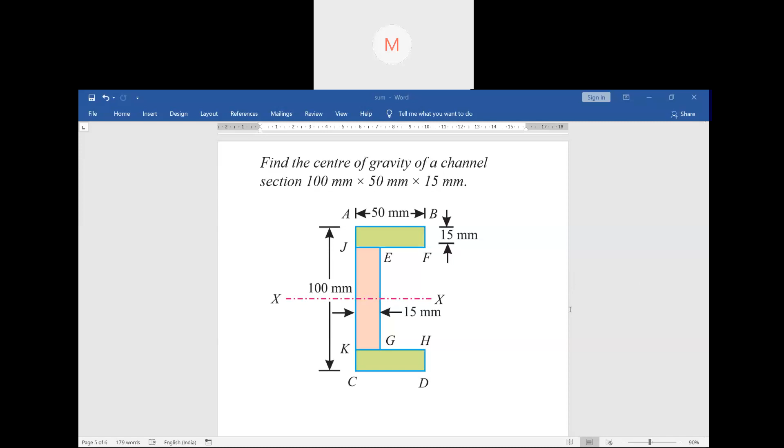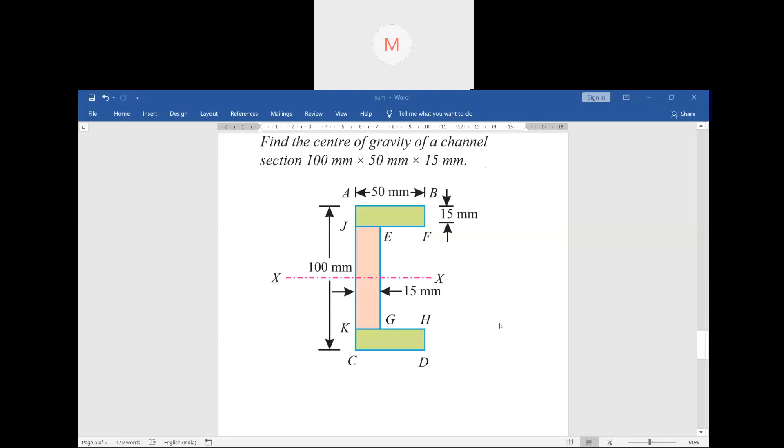17.7. Kabom. Yeah. Kabom. Okay. Okay. Very good. Very good. You guys have tried. That's a very good thing. Those who got 17.79, 17.8, that is the correct answer. Okay. So this is how it is being done. The others who got different answers, you have to refer to the solution. Just have a look at it.

Do I need to explain this numerical to the ones who didn't understand? Yes, someone please respond. Students, I'm asking you something. Do I need to explain it or it's okay? Explain a bit, sir.

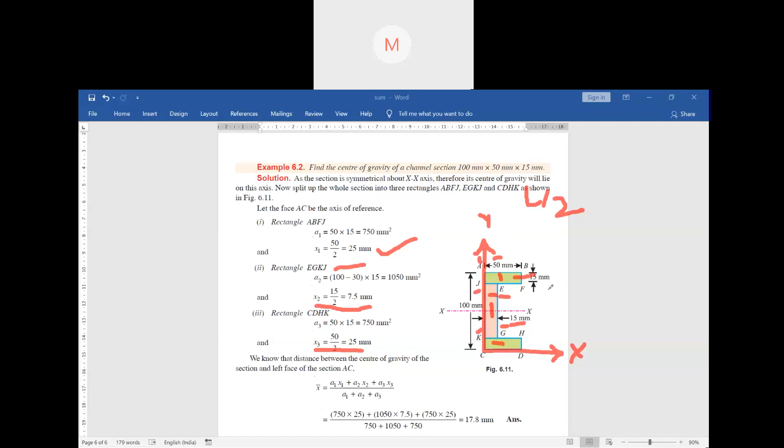Now, if you see here, you found out the area for this one. Now if you have to find out the area of rectangle EGKJ, how will you find out? This is 100, right? The total. Now you have to subtract 15 from here, 15 from here. That means subtract 30. Now the thickness is 15 mm, you all know. So 100 minus 30 into 15, this is how you will find out the area.

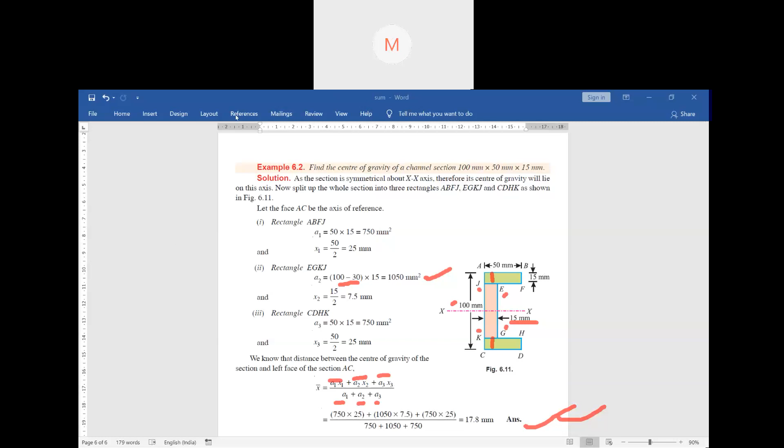Rest is simple. Now we all know the formula. The formula is what? A1x1 plus A2x2 plus A3x3 divided by A1 plus A2 plus A3. And eventually you'll get this answer. Simple. Okay, I think it is clear for everyone. Is it clear? Yes, sir. It's clear. Okay, good. So now we're done with this. So let's go to some other topics. So that last numerical is clear, right? Yes, sir. Okay.

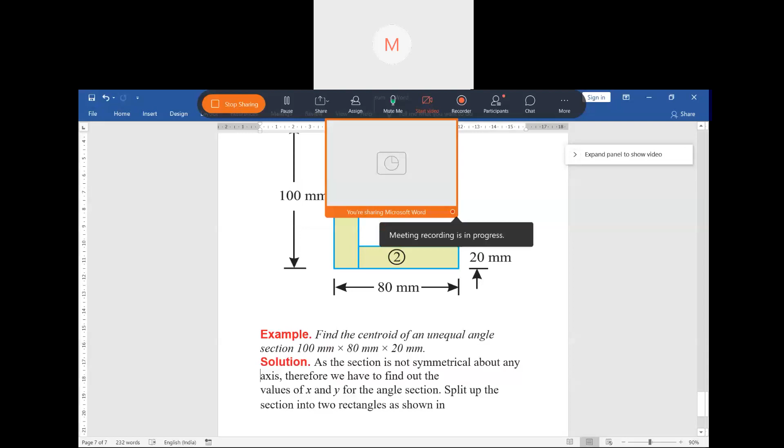So now we are going to solve our next one. So how will you solve it? Can you see my screen? Can you see my screen? Nothing, sir. Nothing. Give me a minute. We can see, sir. Okay.

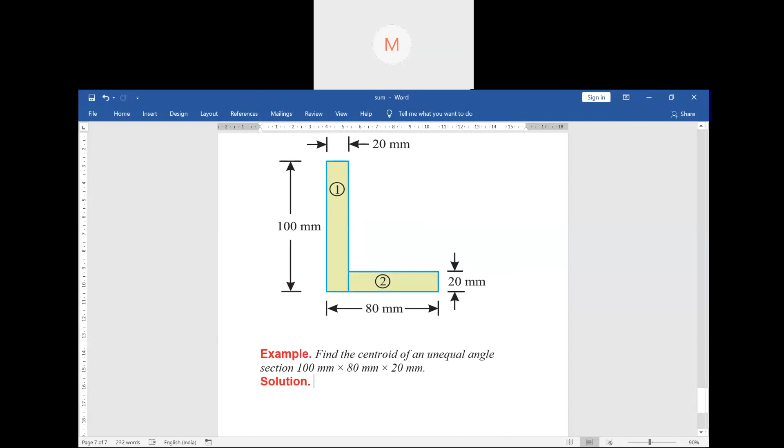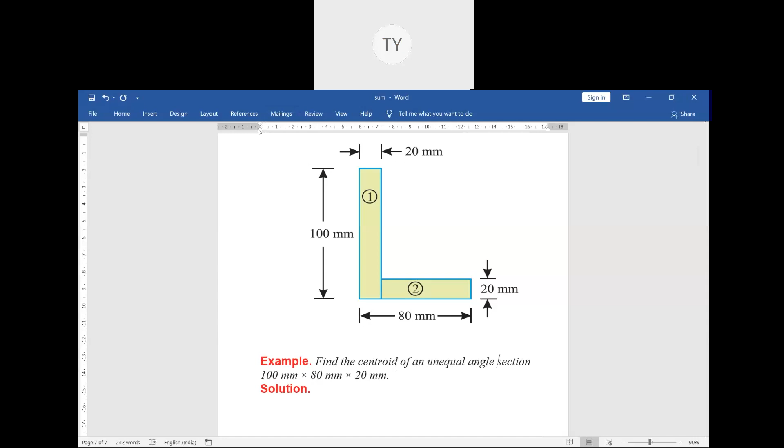You can see it. Now look at this figure. Just pay attention here. So how can you find out the centroid? First of all, tell me if this figure is symmetrical. No, sir, I don't think so. You don't think so? Give me yes or no. Don't give a diplomatic answer, Temazar. No. Yeah, good. That's what should be an answer.

Someone gave yes. Okay. According to Temazar, it is no. It is not symmetrical, right? Temazar? Yes, sir. Okay, fine. Imsong said that it is yes. Anyone with yes? Or everyone is no? Okay. Suraj said no. Fine. So, Imsong, just please pay attention.

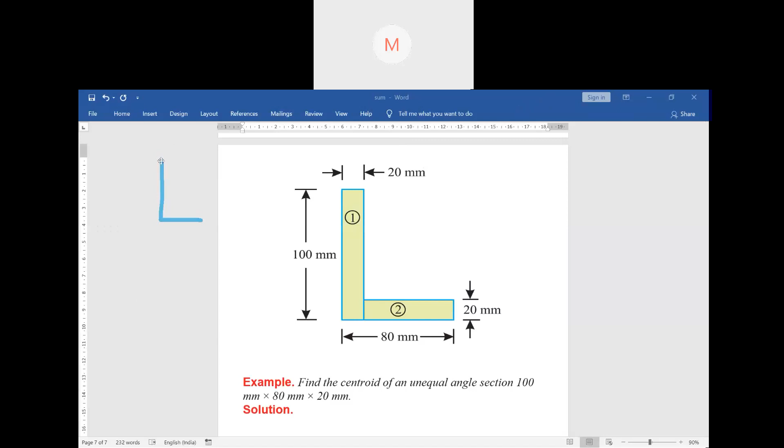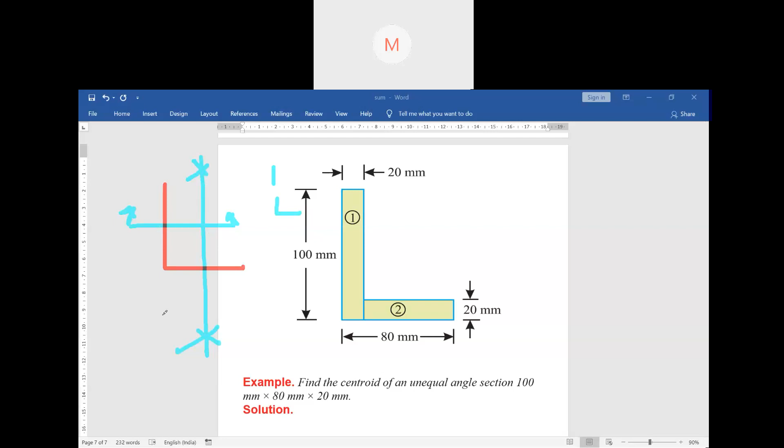So, how can it be symmetrical? Look, if you just divide this figure, this is an L, right? If this is an L, if you cut this from here, this is in Y direction, so you'll get like this and small like this, right? Now, if you cut it from here, you'll get a similar thing only. There are half here and half here. So these are obviously non-symmetric, right?

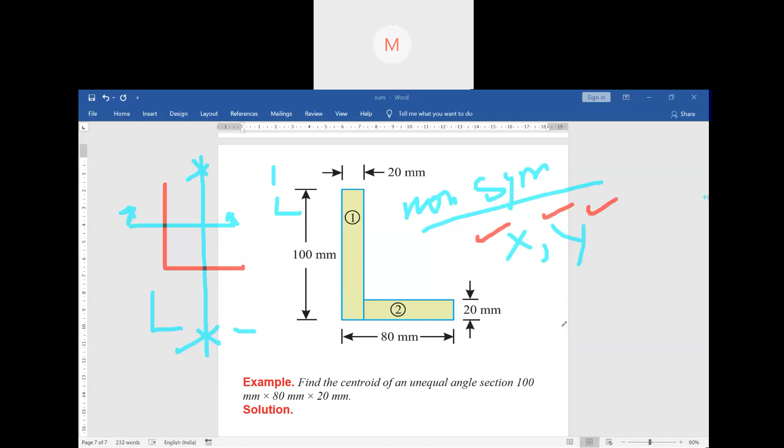So if this is not symmetrical, then there is no point of finding out only x or y. Yesterday someone asked me why we are finding out only x or only y. Look, that is what the difference is all about. If the figure is symmetrical, then we have to find it only for the direction in which it is symmetrical. If it is x, you go for the x formula. If it is y, you go for the y formula. But in this case, the whole figure is not symmetrical, right?

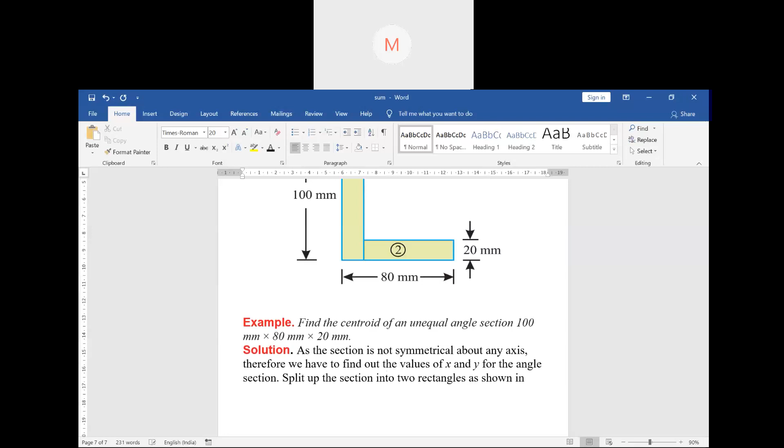If the whole figure is not symmetrical, then definitely you have to find out for both x and y. That means you have to find out a1, a2 first of all, and then you just consider.

Then you just consider it what? Like this, the axis. Here it is this one, like this, the axis. Yes, you just consider this and this, these two axes. So you just consider this is y, and this is x, right?

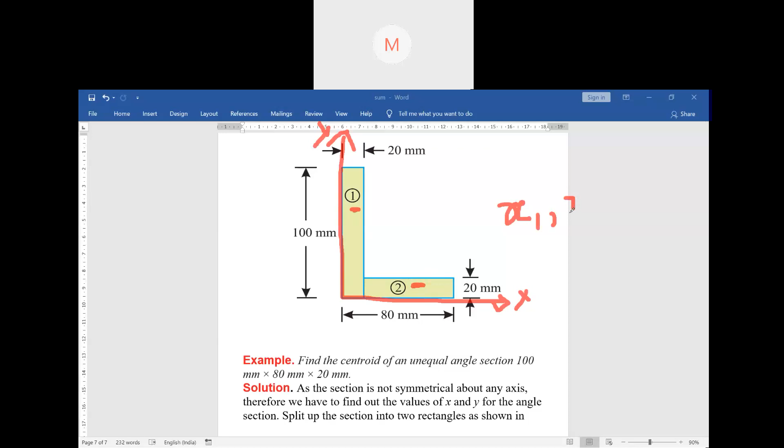So you have to find out what? There are two figures, right? 1 and 2. For convenience, I have just marked it down. So you have to find out x1 and x2, and then y1 and y2, because this is not symmetrical. That is why you have to find out x1, x2, y1, y2. Then only we will be able to find out x bar and y bar, right?

So did you get it? So can you try it out to solve? I guess this is very easy. You should try. Will you try, students? You got your copies, right? Yeah, okay please. Yes sir. Okay, try. Everyone try. Yeah, good. Once you are done, just show me the answers.

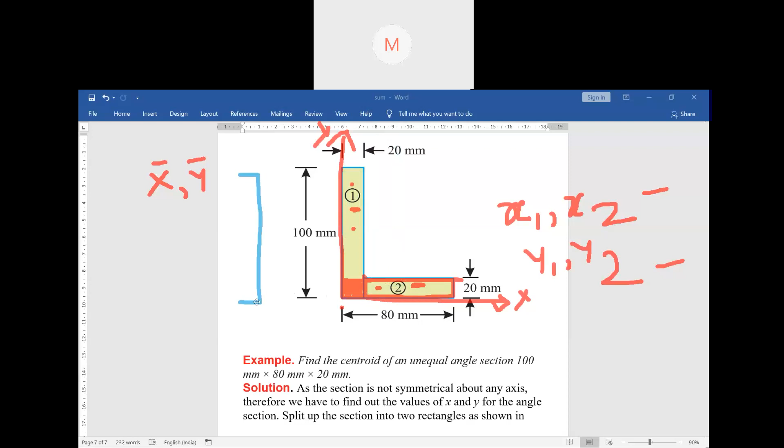That means this part, if you consider here, it is this part. You consider this part here, you consider here this part. Okay, please pay attention to that and then try solving it.

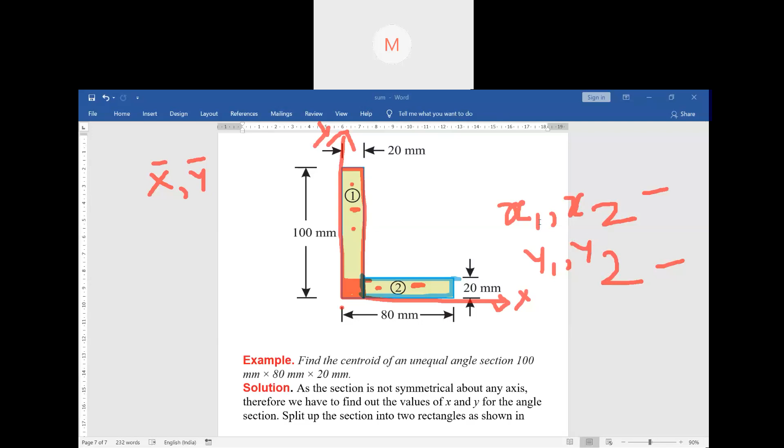Why do you always give your attendance, Pura? I have not asked for your attendance, right? Pura Tachang. So this is not the way to give the attendance. Okay.

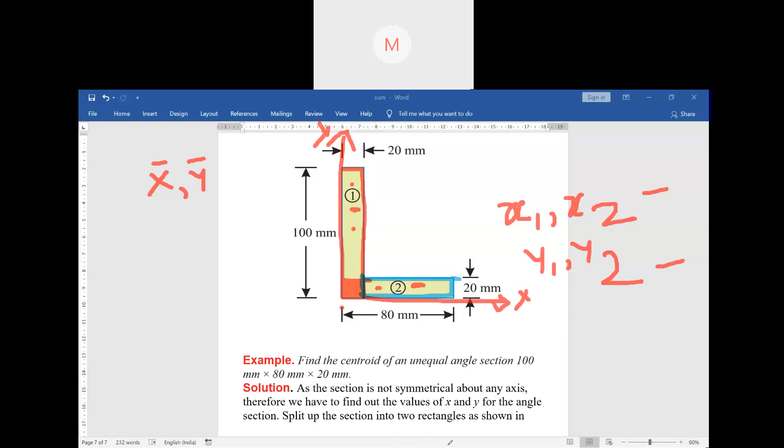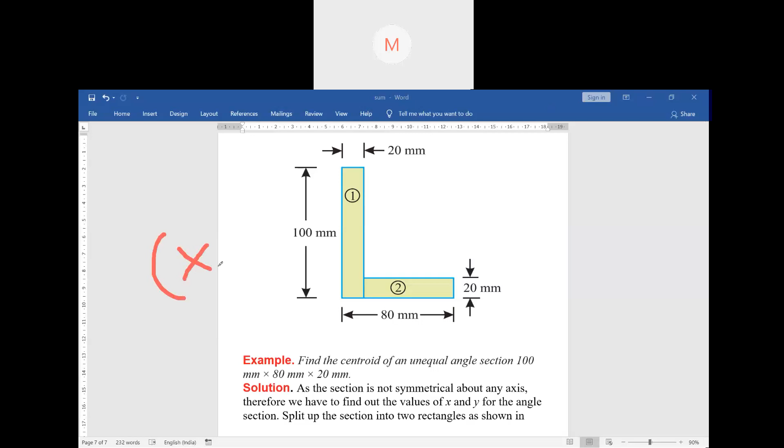There should not be any coordinates missing, you just write it in the form of coordinates. There should not be any, what do you call it, or something like that. I have to ask, in the question it is given, you have to find out the coordinates, right? Your y, just write which one is x and which one is y in the form like this. I'll say everyone should write the answer in the form of x comma y. So what you got for x, what you got for y, just write it down in this manner, the answer.

No, no, you have done a mistake. The answer is not correct. One is correct, but 35 I think is for y, and x I think it is different in the x bar. Just check it out once before solving, because many people will make this mistake. So while finding out x and y, look, so what will happen?

Yeah, John Kerry, your answer is correct. John Kerry's answer is correct. Just write it in this manner, John Kerry, in this manner, okay, in the coordinate system. It will be as given in the question. Find the centroid, right? So the centroid is basically what? Centroid is actually a point. Since centroid is basically a point, you have to write it in the form of coordinates. So please write in the form of coordinates when you are asked to find the centroid. Okay, John Kerry, please write the answer in the form of this x and y.

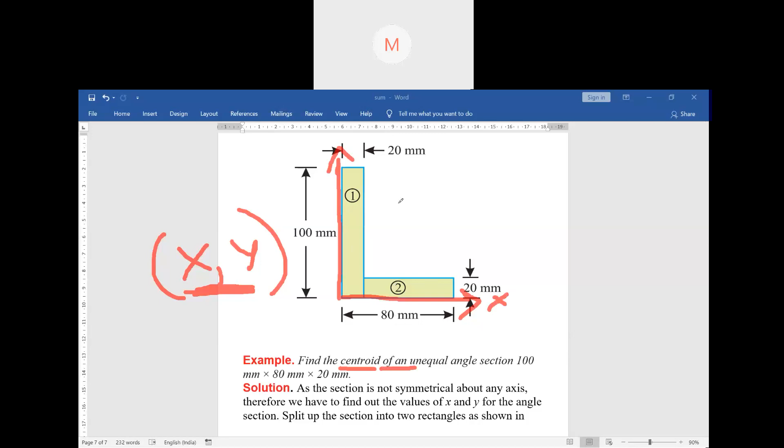Many people make one mistake here. I'm just trying to highlight that. Look, on the x side, if you have to find x1, it will be simple. This is 20, so 20 by 2 is 10. But if you have to find x2...

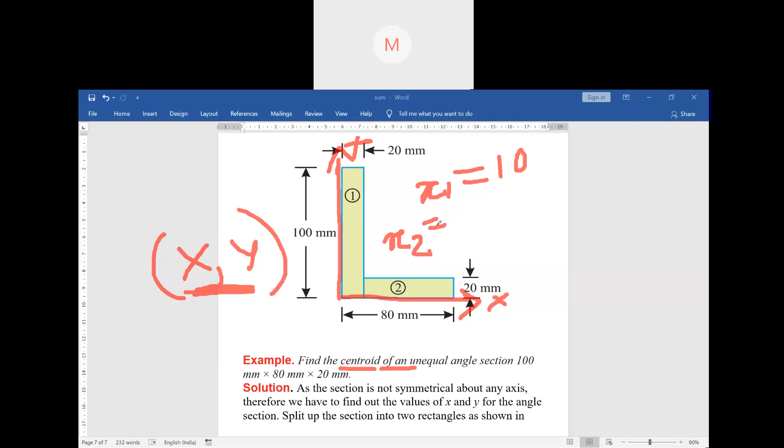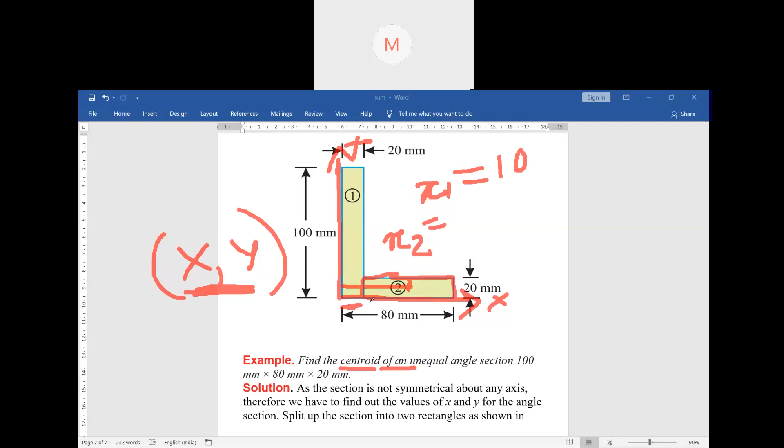X2 will be what? This is the center point of rectangle 2, that means this one, right? So this is the center point of this rectangle here. That means here. So what happens? Not only this, but you have to add this one also. So here it is 20, and here the distance is 80 minus 20, which is 60. So 60 by 2 is 30, plus 20. So x2 will be 50.

Similarly for y it is the same. y1 will be 100 by 2. And y2 will be... here only 20 is there, no? So 20 by 2. Simple. So eventually you can find it in the form of x and y.

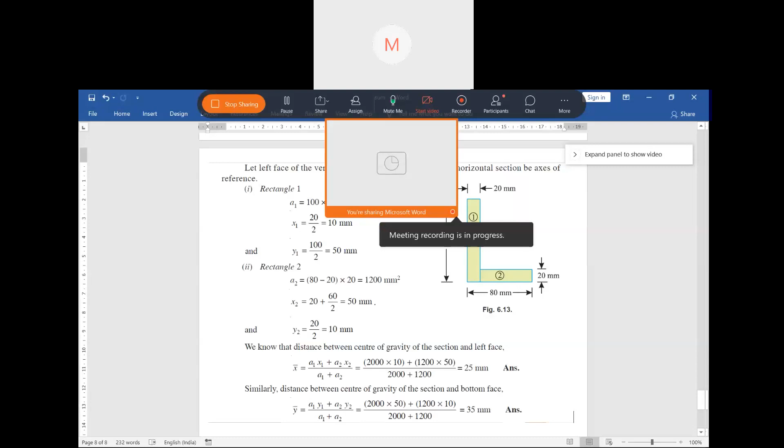So look at the answers. So how it is done is this. Look, I told you, your main motive is to find out x1, y1, and x2, y2. So if you have to find out x1, y1, and x2, y2, what you need to do is what I just told you right now. Many people have done it correctly, very good.

If you have to find out like this, look. So for rectangle 1, how will you find out? Area is length into breadth, right? If area is length into breadth, then this one, you got it, this one. Okay, now you find out x1.

How will you find out x1? Look, you just consider this axis. Now x1 will be this one. So in this x direction, 20 by 2 is how much? 10. Now you have to find out y1 here. How will you find out y1? So it is in the y direction, right? So this one. So y1 is 100 by 2, 50 mm. Fine, the first is over.